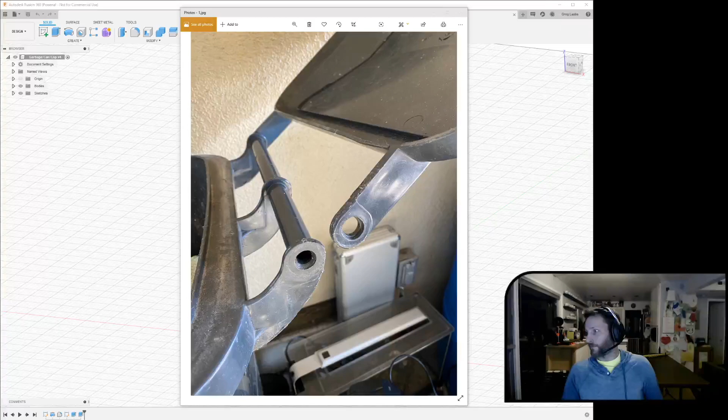So I had this problem where my garbage can lid broke because this bolt thing that goes in there snapped. That piece right there. So I designed a replacement in Fusion 360, iterated one design, printed a final, and it works perfectly.

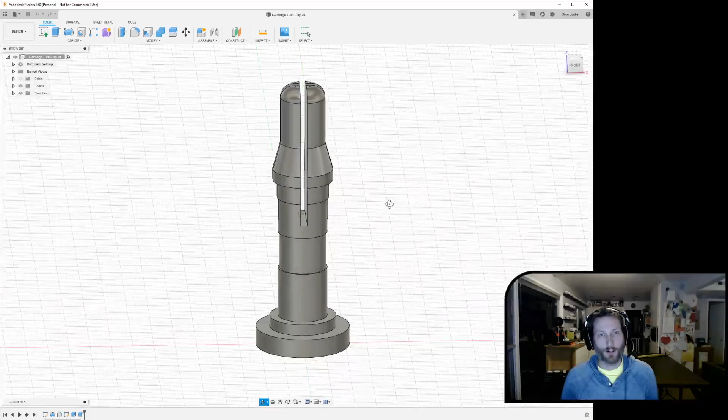A couple people were interested in how I designed this in Fusion 360, so I'm going to give a crash course in how I did it. So this is the end result of what I printed. It works perfectly so far. I have no idea how long it'll last, but hopefully a long time.

So first, I'm just going to give a crash course in a couple of basic Fusion 360 concepts that I think will be helpful going into it. If you already know the very basics, you could jump a little later to when I get into actually making the piece. I'm a beginner in Fusion 360. I learned it just a couple months ago. I've made like 5 things in it.

I really don't know what 90% of the things in this interface do at all. But maybe that'll help show you that you don't need to be an expert to actually be able to use it to make things. So in Fusion 360, it's parameterized design.

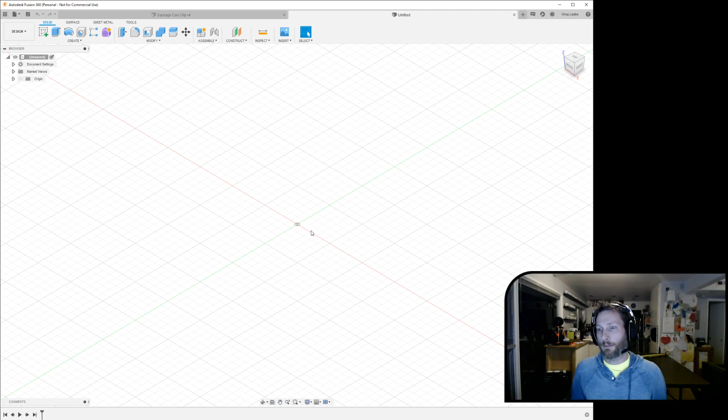And what took me a long time to wrap my head around is that I kept thinking of it like Photoshop. You'd be drawing and modifying it and using a bunch of tools and drawing on top of it and stuff like that. I no longer see Fusion as that at all. I see it as a series of mathematical equations, or operations that you want to do on your model, and then it computes the end result. And hopefully that'll become more clear in a moment.

Let's just talk about how you make very basic things in Fusion. Most of the time, when you want to make something, the first thing we do is we create a component. I actually don't know why we create a component. I learned this months ago and forgot. But what I remember learning is that it's similar to making a branch in Git.

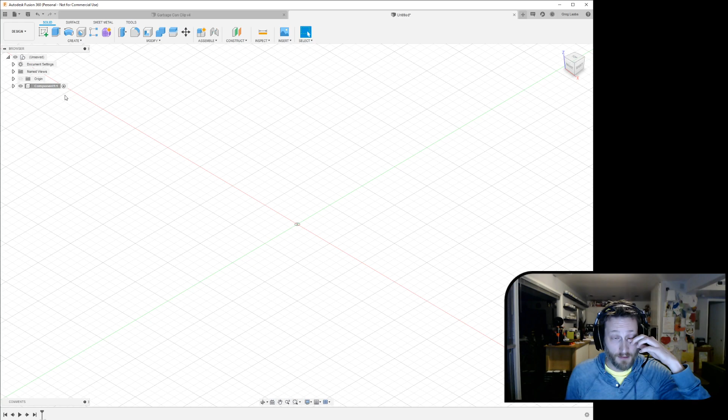You do it first because later, if you need to have had a component, it will be really annoying if you didn't do that as your first step. Exactly the same as making a branch in Git. So just make one and then don't worry about it. And now that component is active with this little dot. That means everything I'm now doing is inside that component, which is what we want.

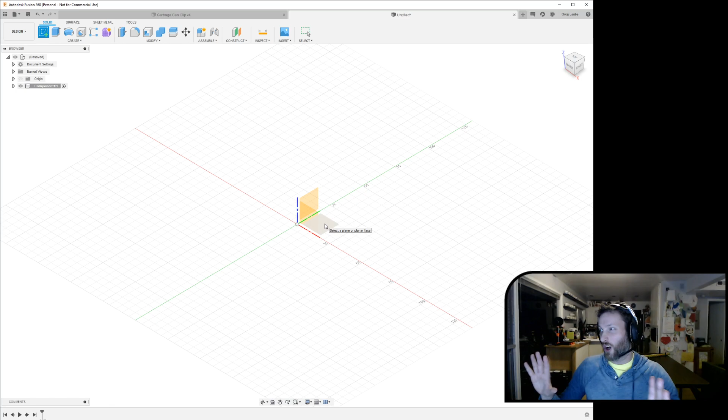So first things first is we make a sketch. You click this create a sketch button and you're already confused because you're like, oh geez, what's going on? All you're saying is what plane do you want to draw the sketch on, because it's going to be a two-dimensional sketch. So I'm just going to click on any one of the planes, and now I'm sketching.

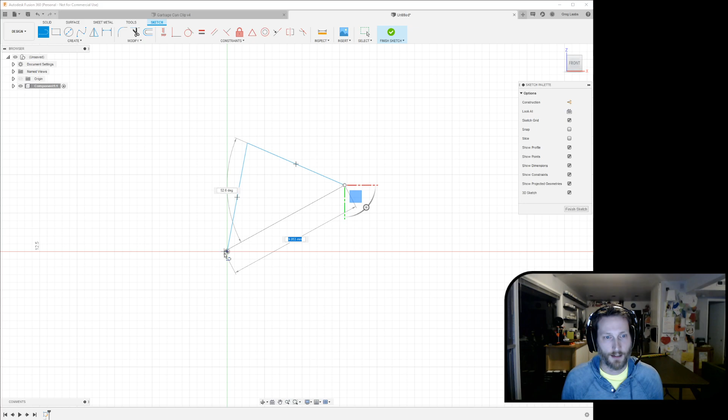Now it didn't actually pull my camera facing that way. I think it used to. I may have changed an option, but you have this little widget up here that you can always click to jump to the side that you're on. So here is what I'm going to do. I'm going to use this line tool in sketching, start with the origin, and make a triangle. Okay, and I'm going to click finish sketch.

Now that's a two-dimensional thing, and now we want to make something three-dimensional. So what you do next is you're typically going to pull that into a three-dimensional shape in some fashion. Oftentimes that's through extruding. There's a reason it's the very second button. Extruding simply means that you're going to pull that sketch, and now it's a three-dimensional object. And there's a bunch of options over here whenever you're using one of these tools.

So I did extruding from one direction, but I could do a symmetric one where now as I pull, it's going in both directions. And by default, it's going to create a new body when I do that, which is what I want to do now. But you can also extrude as a cutting tool, or you can extrude and join it to an existing body. But for now, we'll just do that.

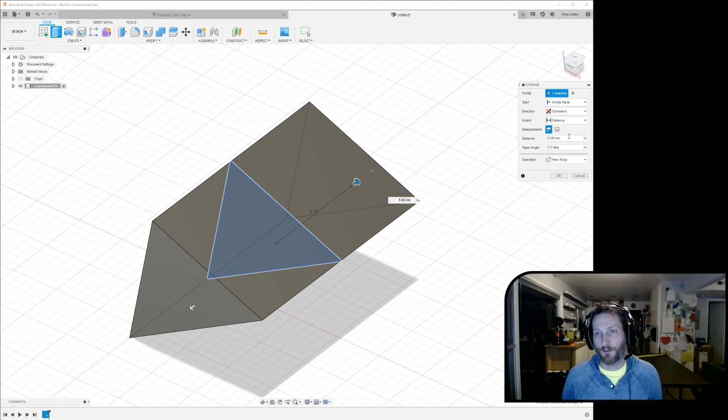Now we have this prism, right? So okay, now we've made a shape in Fusion. And why is that different from other things that I've used, or my assumption that it would be like Photoshop? Like any other tool in the whole world, you have this history bar down here. Actually, let's do another operation on this thing.

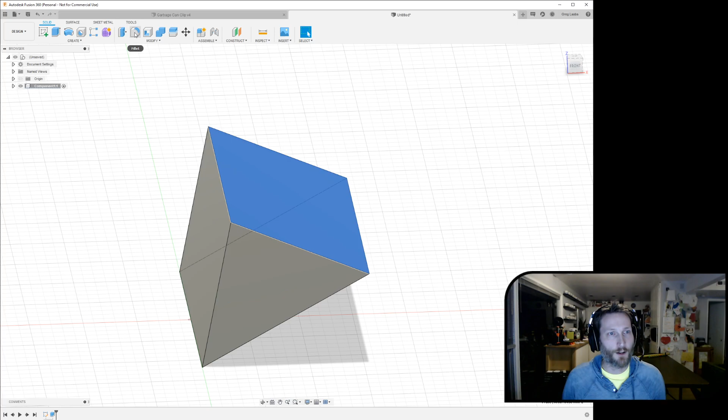So I'm going to modify this thing one more time by selecting a face, and I'm going to use one of these modify tools like Fillet, because that's kind of a fun one. So I've got Fillet here. I'm going to drag this here. Whenever you're dragging, you also see the numbers here, like I could type it in if I knew how much. So I'm going to fillet this, which is gonna do that.

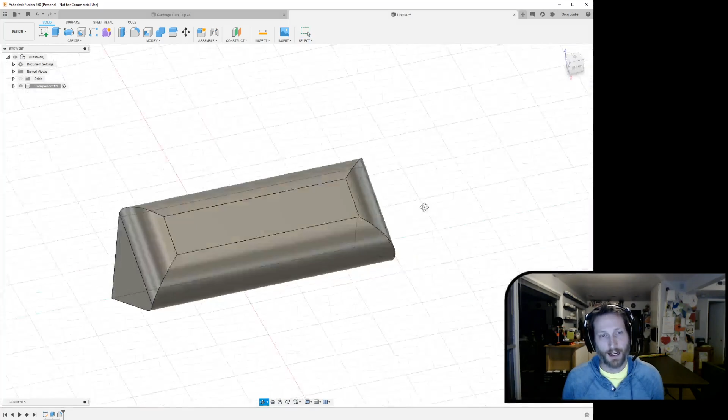Okay. Now my shape is looking really funky, right? And it kind of acted a little weird because it was a rectangle, not a square. So we've got this. But let's say, on the very first step, I screwed up, and my triangle needed to have been a totally different shape. Well, down here in the history, you can drag your little history bar back to go back in time. That's nothing special, right? This is back before I extruded it.

Oh, something that you're noticing here is the sketch is invisible. This is your hierarchy up here of your project. So if I expand my component, I have sketches and bodies. This is the body. This is the sketch. The sketch became hidden. Fusion does that automatically after you extrude or turn it into a three-dimensional object in any way, just because usually that's what you wanted to do and you don't want to see it anymore. So it's convenient, but if you want to see it again, you got to toggle it back on.

So I can go back in time and see the sketch, right? But notice that when I'm back in time here, oh, never mind. The thing I was going to say is not true, so ignore the thing I didn't say.

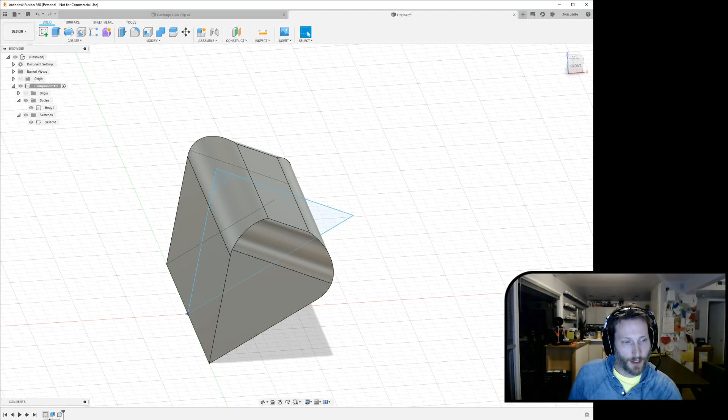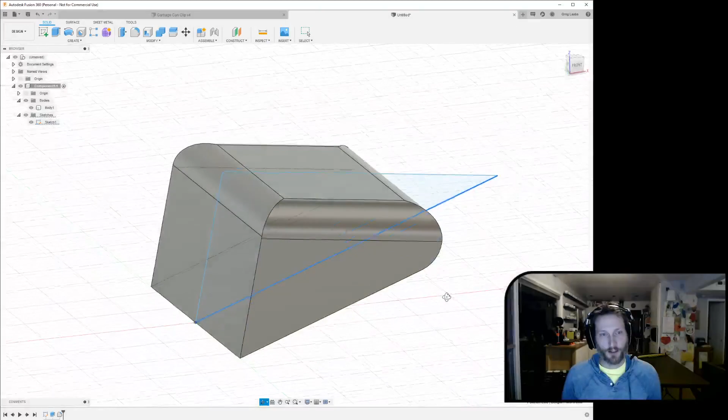But let's talk about how this is different, where if I double click on this sketch here, I can edit the sketch again. Let's make it like a much sharper triangle and do finish sketch. Now, I'm already looking at the finished product as if that was the sketch I had done from the very beginning. When you modify something in the history in Fusion, you're modifying the parameters of that operation, and the future things you did on the shape are still there.

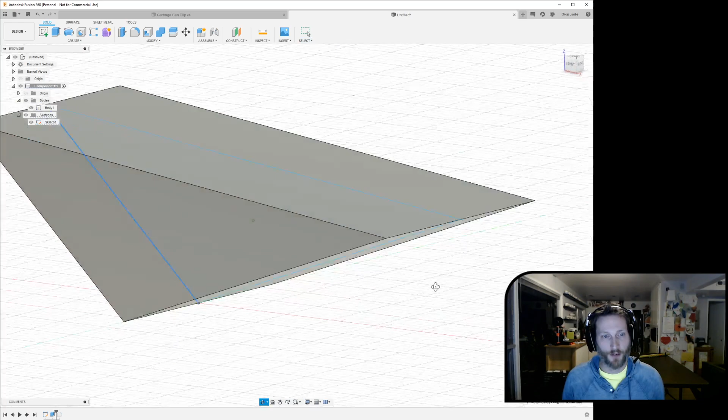So the fillet makes it a little hard to tell that it's going all the way to that end, but if I undo the fillet, for example, we can see that's the prism that it made. It's the long triangle now. And if I go back and edit the sketch again, I could change it completely. Actually, I don't know how to break this into another piece. We'll get to that in a moment. But if I changed it completely and made it like that, now here's my prism. And if we go back to what it looks like with the fillet, there it looks like that, right?

So that's like the first sort of mind-blowing thing to me. I've never used any other CAD tools before, so I was not familiar with any of these sorts of principles. And it's the thing that took me the longest to figure out, is that Fusion is just computing a series of operations and giving you the end result. And once I wrapped my head around that, figuring out how to make things in it became way, way easier. Let's jump back for a moment.

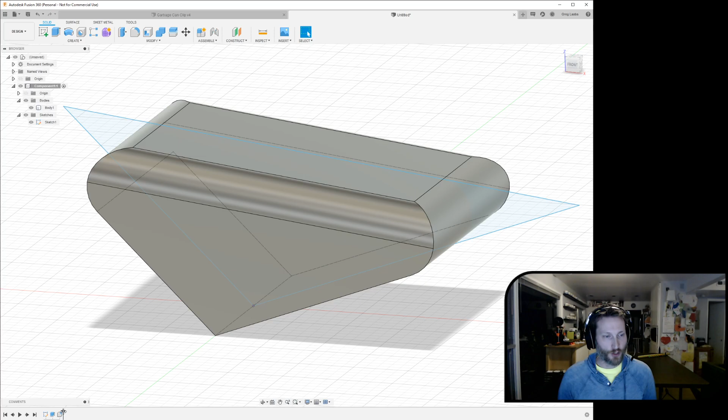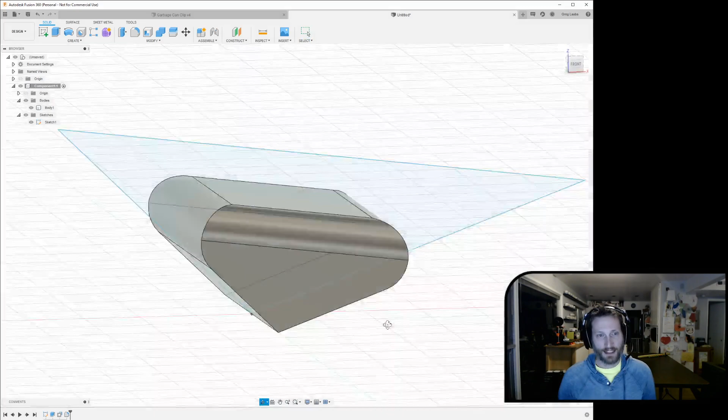Let's actually delete these. So if you go back in time, here's another important thing to know. If I go back in time and do another thing to this face, like press pull, I actually don't know what this does. Oh, it just sort of changes the shape there, and then press OK. The fillet operation still happened. And if I go back to the present time in history, that's now what it looked like after I pressed the face and then filleted the face.

So when you go back in time, it's not like Photoshop, where if you go back here and then do something, it wipes out the future. You're just inserting a new operation in there. So if you don't want to have done any of that, you actually have to delete what you don't want, right? So it gave a warning because I deleted something that a future operation depended on, so it warned me that it was going to delete the future operation. Let's talk about one other way that you can.

There are lots of ways that you can create a shape from a sketch, but I'm going to talk about the only other one I've ever used, which is the very third button up on the interface, which is Revolve. So Revolve, instead of extruding, which pulls a sketch out, Revolve spins a sketch around an axis to create a three-dimensional object. So when I use the Revolve tool, first it's having me select the profile.

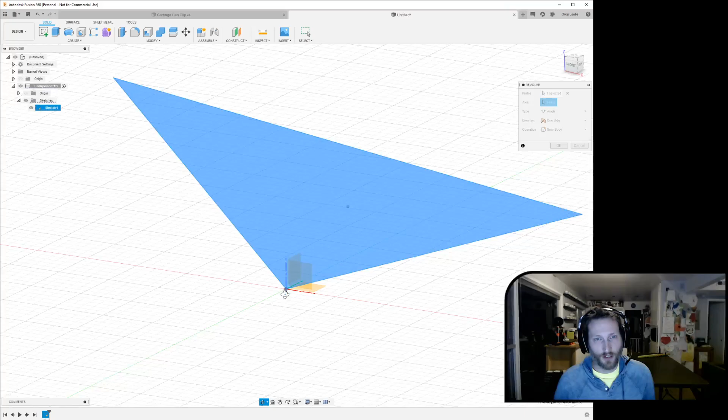This was already selected because it was selected when I pressed the button. And then it's asking me for the axis. So for the axis, you can give it a world axis, like these X, Y, Z's here, or you could select a part of a sketch or anything else that it lets you select in the design. So let's revolve it around just the vertical axis, the Z axis. And then click, what are we doing?

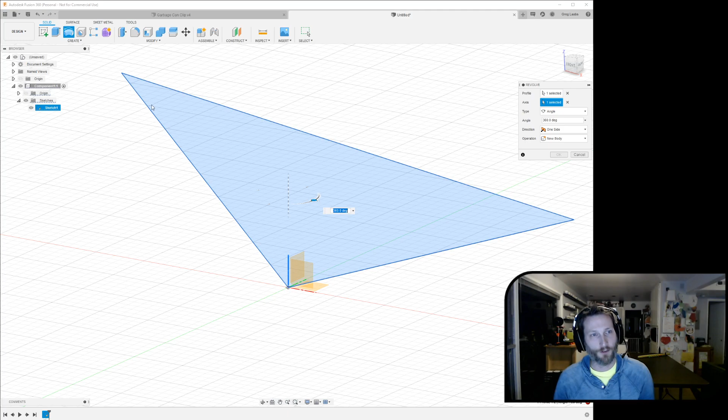There's an error. Oh, there's an overlap. I can't revolve it around that because it's on both sides of the axis. So instead, let's pick this line here. If I had kept it as a triangle with a vertical line, it would have worked. But let's use this as the axis. We can see what we have is now a cone.

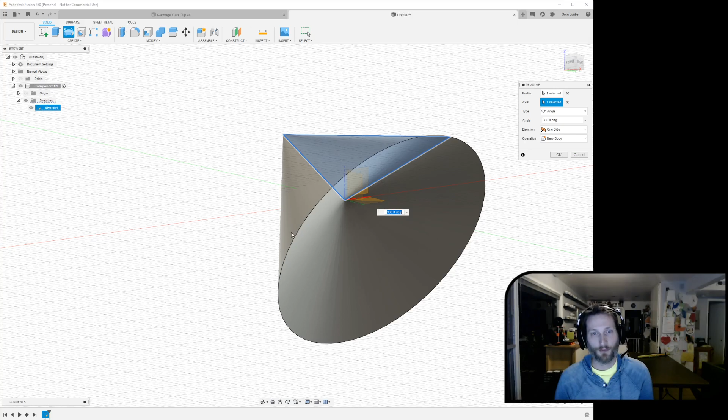Actually, it's not a cone. It's a cone with this little, I don't even know what you would call that. I'm failing high school geometry here, but whatever. It's got a hollow area here because that shape revolved around that. And so now I have this body that is that shape. So that's the very, very basics. Let's jump into making this thing.

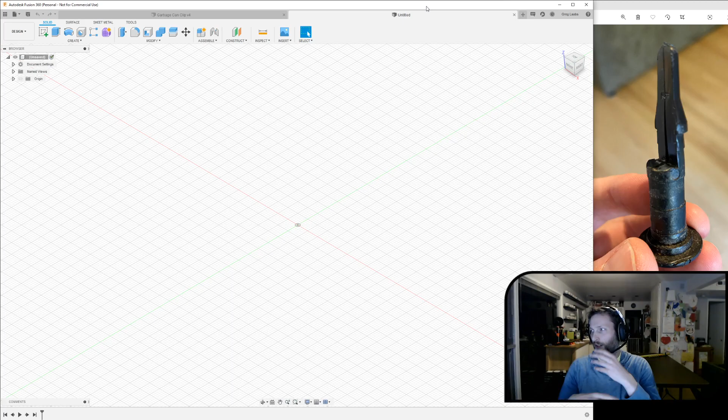So I'm just going to go ahead and wipe that whole thing out and not save it, and click up here for new design and start from scratch. So when I was looking at this piece, which I'm holding here as well, because I'm going to do some real world things that I will show you. Let's jump back to that and put it over here. I was looking at how would I create this from scratch. And so what I was saying about visualizing this as a series of operations is really important for figuring out how you want to start.

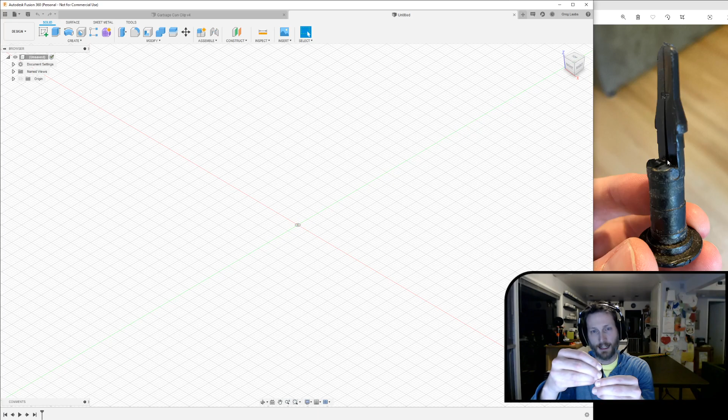So when you look at this thing, the most important thing to realize is that it is entirely a revolved silhouette around the middle axis. There are cuts in the middle here that let it bend in the top, and that's how it pressure clips into the end. But let's ignore that for now because we can cut that out later. What we want to concentrate on now is if we just make this silhouette here, the edge of it, we can then revolve it around, and we'll get this shape.

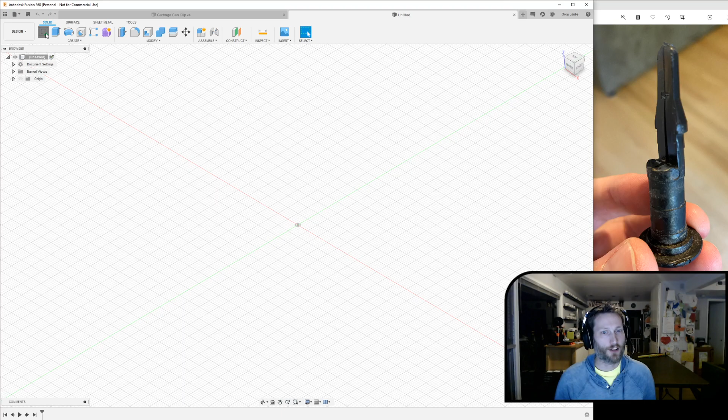So how I got started with that was I'm going to put it on this axis here. Again, it didn't move my camera, but there we go. And the way I did this, just because it worked for me, was I decided to just freehand make the shape. The dimensions are going to be completely blown to hell. It's not going to be the right thing at all, but it will still work. So I just use the line tool. I'm going to start right here. This is going to be the bottom middle of it.

So while the original is actually rounded on the end, since that's where it's going to sit on my print bed, I'm just going to have that be flat. Also, I think it's just for aesthetics, so it doesn't really matter. So mine's flat on the end. And we see that goes out kind of far. That's that little bottom bit there. Then it goes here, and it's got some amount of height. It goes in more, like a little bit.

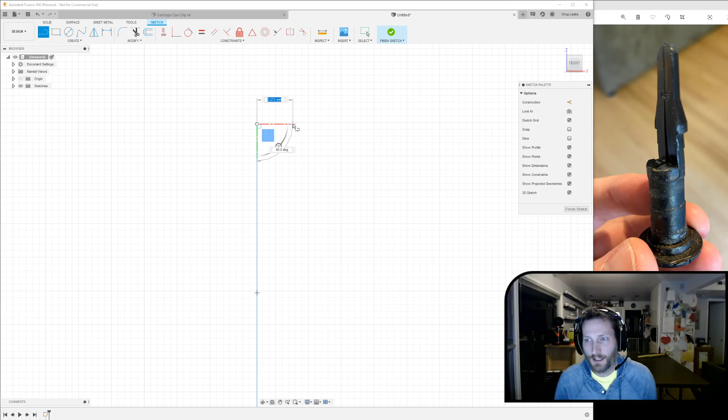And then it goes in just a teeny tiny bit and goes here, and it goes in a teeny tiny bit again. And then it comes out. Oops, I'm going to zoom in to get a little more control. It goes out a little bit again. Oh, hang on, I got a constraint that I didn't want. Actually, we'll leave that there so we can talk about it later. And then it goes out some more, and it comes over this way a bit more.

And I think this is where it goes like this, and it does a slope in this way. And then it goes up to the end. I'm going to make the tip flat here just for ease, and I'll show you why I'm going to do that later. And then it goes all the way back to this axis here, which I was hoping it would snap to, but it's not.

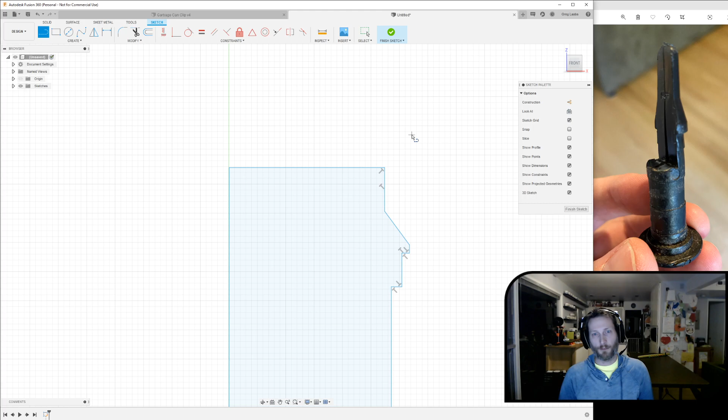I'm just going to get it as close as I can because I can fix it later. And then I complete the shape. Okay, so I've now made this freeform shape here. And in fact, just to see how it looks, I'm going to finish the sketch. Now I have this thing that is totally the wrong dimensions, but it doesn't matter.

Now we're going to go ahead so we can see it in 3D space. I'm going to do that same revolve tool around this axis. There it is. That's my thing. Looks exactly like it, right? Not at all, but it's the right basic structure. And I'm going to go ahead and make it. So here we go. That's it. Now we just need to go back and fix the sketch to be accurate.

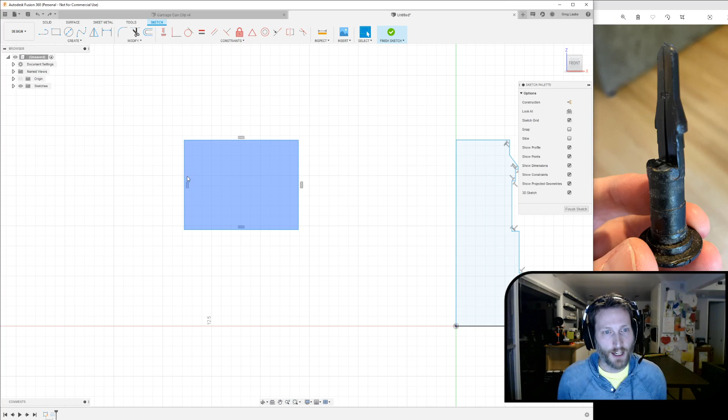Now, I want to talk about some of the things. There's like a lot of icons on the screen. And understanding what these are is pretty important for working with sketches and not getting incredibly frustrated, because it's going to do things that are unexpected if you don't realize what all these little icons are. So for the sake of talking about this, let's just make a rectangle over here. And let's look at what happens when we make a rectangle.

You always press enter to finish an operation, or alternatively, you can right click and there's an OK or a cancel there. Right click is just a shortcut to things that are elsewhere on the interface. Just if you get stuck, but you should definitely watch a tutorial on the basics of the Fusion interface.

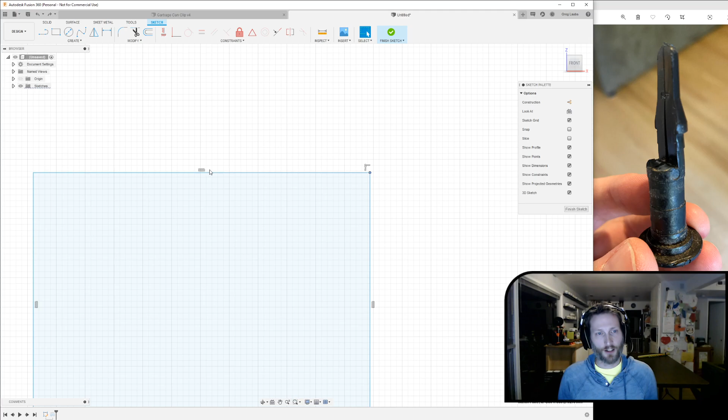What actually happened here when we made a rectangle was it created 4 line segments. So remember high school geometry, a line segment is just a line in between 2 points. What's interesting here is if I click on this point, there's a little icon here, and what all of these icons are is they are constraints. They are parameters for this sketch that Fusion will not violate. If I go and grab this side, it lets me go left and right, but it doesn't let me go up and down. Why is that?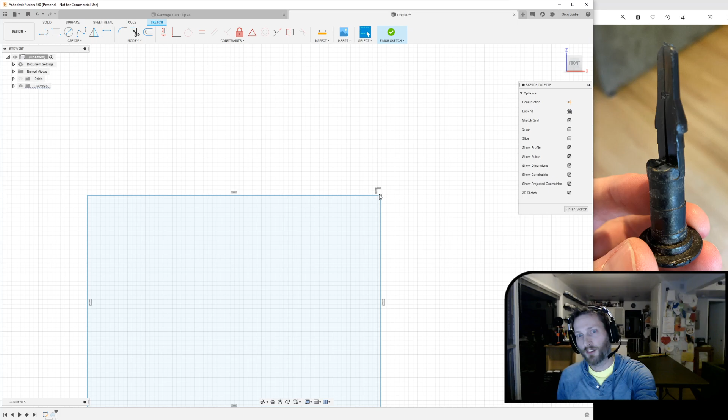Well, I made it as a rectangle, but how does it know that it wants to always be a rectangle? It makes some assumptions when you make sketches that are usually right, but not always, because it can't read your mind. So these icons right here, these are vertical horizontal constraints. Yeah, this is called a horizontal constraint. It is saying that this line segment here must always be perfectly horizontal. And same with this one, and these two side ones have vertical constraints.

Furthermore, if you click on a point here, this one's kind of interesting. There's a constraint here called coincident. What that really means is if I drag this point, notice how the whole shape moves. You could think of it as, well, I'm grabbing the point that those two line segments end in, but technically those two line segments each have their own point. And the reason it moves together is because the end of each of those segments has a coincident constraint, meaning it should be on the same point.

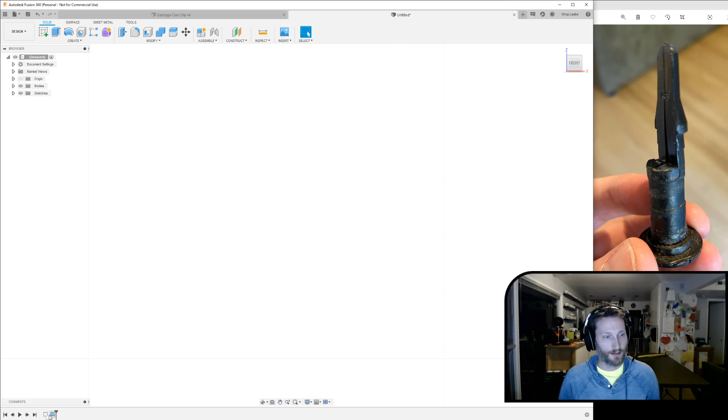If I delete that coincident constraint, you can actually click on the icon and press delete. When I drag this now, suddenly I've broken the shape because these 2 points no longer have a coincident constraint. And I can remake that as a coincident constraint by dragging it over here. Well, let's talk about how you actually make a constraint. It's having trouble getting to where I want it to be, but that's okay.

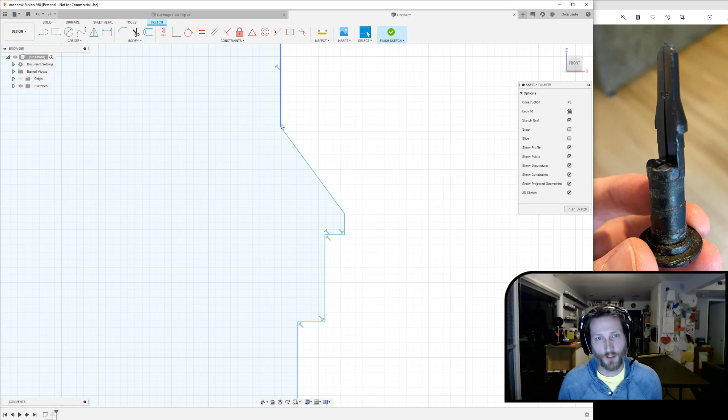What I'm going to do is I'm going to select one of these. Up here, this entire section here is the constraints. Oh, they're all there. So the coincident constraint is this one. If I click here and then click on the other point, I've now created a coincident constraint, and oops, I finished my sketch. That was an accident. Let's get back in there. There we go. It recreated that coincident constraint, and it moved the lines in order to make that possible.

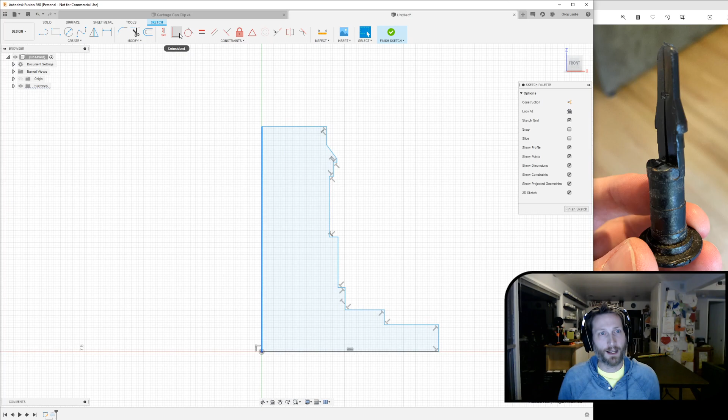So that was just a crash course on what constraints are, and so we're going to delete all of that and go back to this. There's a lot more constraints that we see here. This is one of the most common constraints right here, which is a perpendicular constraint. I also think of it as a right angle constraint. So what it's saying is these two lines here are perpendicular to one another, and it will never violate that unless I delete that constraint. Notice that up here, for this sloped line, there is no perpendicular constraint because it's not.

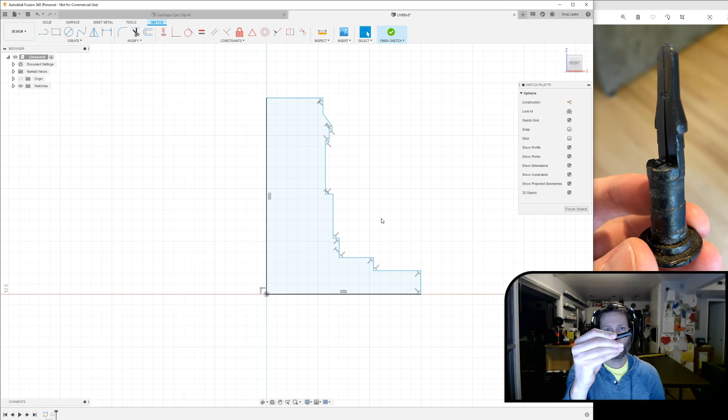It also did not make a perpendicular constraint at this corner because I had to freehand place it, and it didn't actually end up on this axis. Now's the time I can fix that. I intended for this to be a horizontal line. No problem, I can just add the horizontal vertical constraint. It's going to pick horizontal or vertical based on what it's closest to being.

So now this does happen to be perpendicular, it just doesn't have the constraint there. I might not need it. Well, actually, I'm going to go ahead and add a horizontal constraint to this one. Oh hang on, I don't know what I'm doing. There we go. Well, let's not worry about that for now.

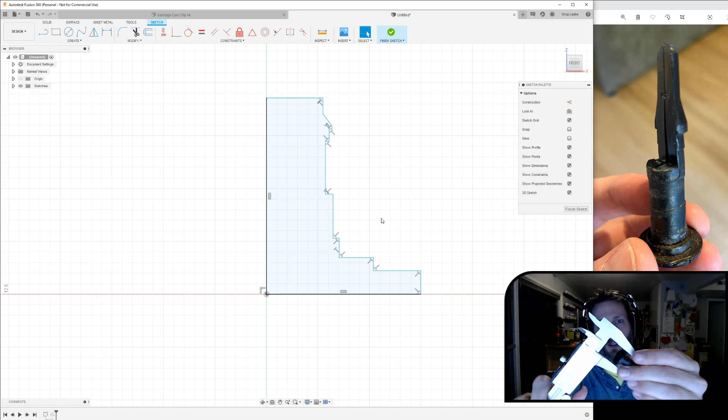So I've got this shape. Let's talk about inputting the dimensions here. This was completely freehand, but now I want to start doing some measurements. To clone this, I need to know the dimensions that it needs to insert into the garbage can. For that, I have digital calipers. These are absolutely critical if you want to make something that fits into something else that you already have, because you need very precise measurements.

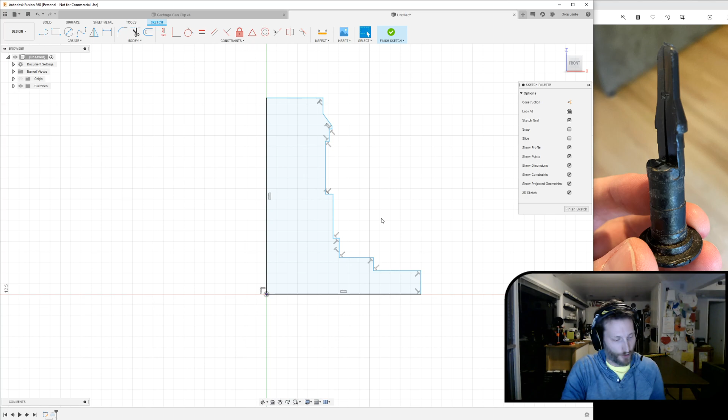So these are digital calipers. It's got a zeroing button, which also comes in handy, that guy right there. So all I got to do is go here, and I measure here. It's a little hard to measure a rounded shape because you could have it off. So the old phrase, measure twice, cut once. I measure like 40 times here just to make sure, rotate it around, make sure I've got it.

And then it says I'm at 21.97. We'll call that 22, that's well within the margin of error of this tool. This measures within a hundredth of a millimeter. I don't really trust it to a hundredth of a millimeter because I can just apply pressure against the metal and it changes the measurement, but the tenth of a millimeter is probably accurate. I've already forgotten what I said it was... it was 22. So here's how I put that into Fusion.

You can apply another type of constraint. I guess it's not technically a constraint, but it's called a dimension. That is, I'm going to input the dimensions of a particular part. So that's this tool up here, it's also the D key. So you push it, and you basically press on the line. You click on the line that you want to give it a dimension.

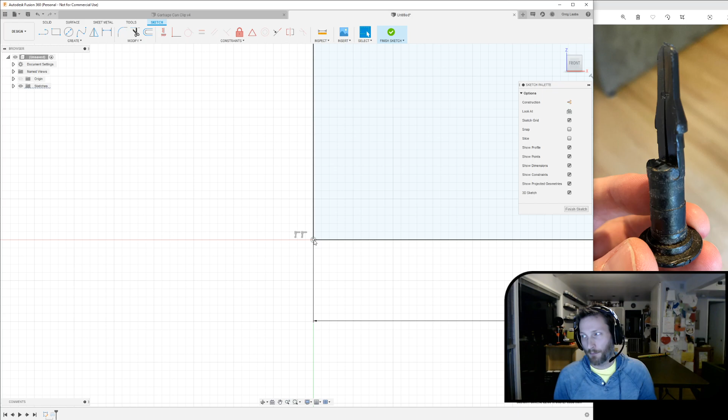And I measured this, I measured from here all the way to the other side, the imaginary other side that we don't have in this sketch. So I'm going to do this very bottom line, it'll be the flat bottom of this whole thing. So what I do is you click there, and now you've got this. Where you place this is just for aesthetics, it's just wherever you want it to be.

It's right here, and oh look, this is only 7 millimeters, so I was way small. I put in 22. Boom. Now that is 22. The reason I called it a constraint is because now Fusion won't violate this. This is locked in when I go to try to move things, so if I try to move this point, I can't move it left and right because 22 is locked in.

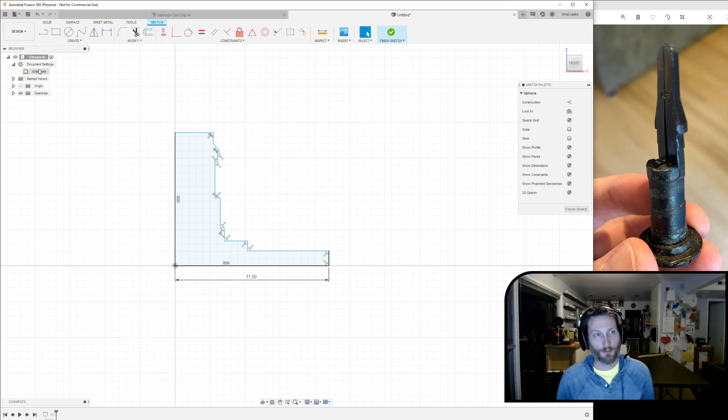And there's another constraint I didn't talk about. When I started my sketch on this origin point at 0,0, by starting it there, it created - I think it's a coincident, well, it locked it to that point. I think there's a coincident constraint there to make that happen.

So now this is locked in at 22, except I made a mistake, which you may have already noticed: 22 was the entire diameter, I actually want that to be the radius. I don't have to do the math myself, I can put in a formula here. So that way I know this is the original measurement I took, 22 divided by 2. Now it becomes 11, but the formula is still there.

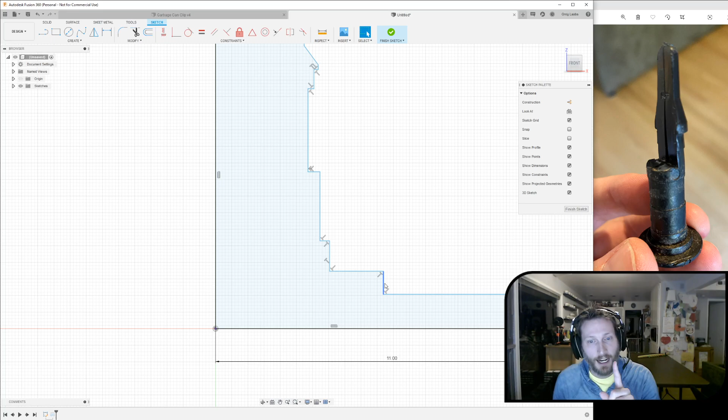Okay, I didn't say this in the beginning: I'm working in millimeters. It's really important, up here in your hierarchy, to expand your document settings and make sure the units is set to the unit type that you want to work in. Because you can type everything here without units, but it will use whatever the document's units are, so make sure you set that. You might need to set that in the beginning - I don't know if I change it now what happens. So do that first, even though I didn't. It remembers, I'm pretty sure, it's just always been millimeters for a long time now. So now, how do I set the constraints for the next area?

So let's say I take the measurement. I'm not going to get accurate measurements here because it doesn't really matter for this tutorial. I'm going to go and measure this next little bump in, right? And it's 15-ish, so let's call it 15. Well, I don't have a line to work with that goes from this wall to the middle, and that's what I want to input 15 as.

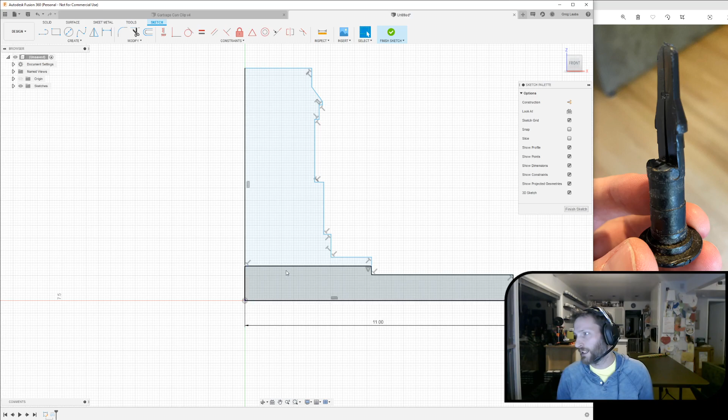So what I can do is, Alexa, turn on the family room. Sorry, my auto off. What did that happen? Oh, because I quit Steam.

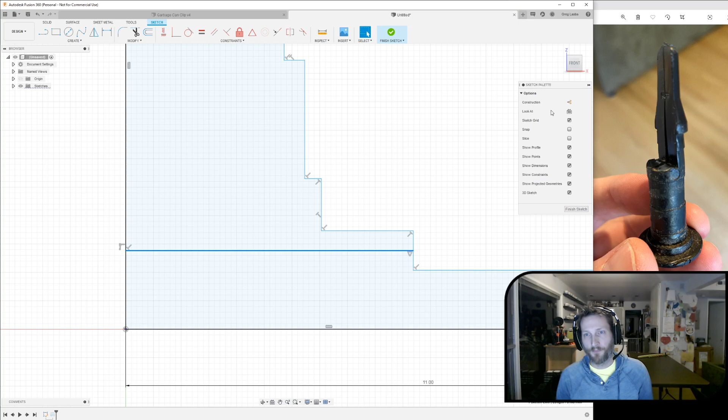Anyway, I don't have a line from here to here, so all I have to do is make one. So right here, when you're drawing a line, you can see another constraint icon. See when I'm in the middle of the line, it makes the triangle? The triangle happens to be the midpoint constraint, just because it's nice and pleasing to my symmetrical sensibilities.

I'm going to start there. I'm going to go over here and see how it kind of snaps when it's horizontal. It wants to help you do what's obvious. So I'm going to go from here and then go there.

I now have a line, but I also have a problem because now my shape is separated into two, and I didn't want it to be two shapes here. I just wanted this just for the sake of measurement. Well, Fusion has a concept for that.

You click this line, and you can right-click it, and it's this thing right here called normal/construction. It's a toggle. So everything here is normal. There's also a button up here that does the same thing. Fusion has a lot of ways to do the same things. It's also X, which I use a lot, so I use X a lot.

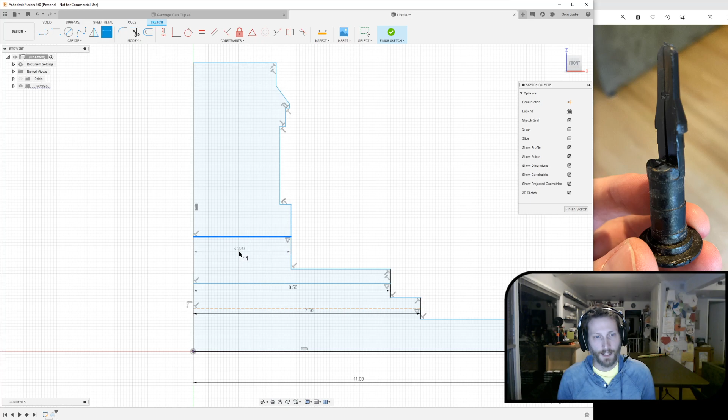If you change it to a construction line, it no longer has what you might think of as a physical meaning in the sketch. So it no longer divides the shape in two. It is there strictly for construction purposes, which is what we want.

So now I can use the dimension tool again. I'm going to press D. Since I already had it selected, it was already there, and I'm just going to put it right below it. And now I said this was 15, right? This time I'm going to remember to divide by 2. Now it goes 7.5. So what I did was I put a construction line that's bound from here to there, and then gave it a dimension, and now we have the next step down.

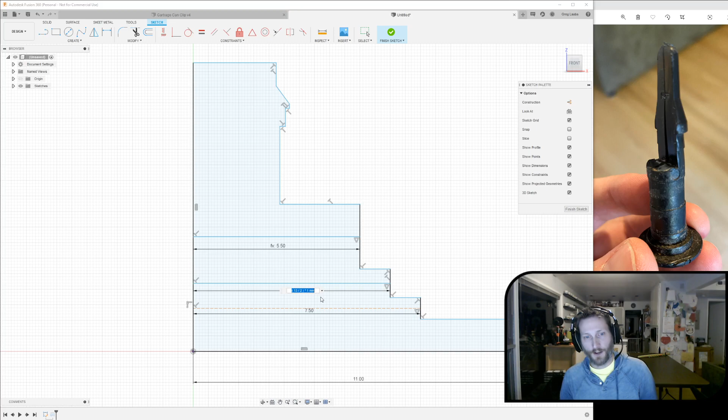So let's just pretend this next one was 13. I'm going to do the same exact option. I'm going to press L, create a line from here to here. Then I'm going to push dimension to do that, and then we're going to call this one 13, right? And then we do the same thing here, from here to here.

I'll give you a little tip on this next one, since we're not going to do this whole thing. Instead of saying, okay, I'm going to do let's say this one's 11 divided by 2, let's say if what was important to me was that it was 1 millimeter less than this one. Well, while my text input is in there, I can also just click on another dimension, like this one.

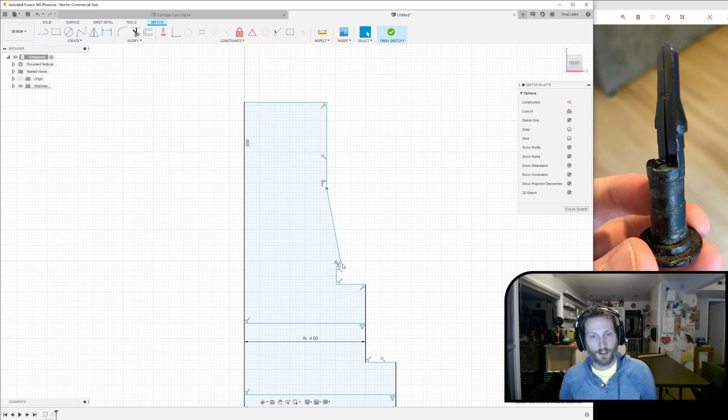That dimension happens to be named D4, because it was the fourth one I made. And then I can go -1. So this, and see how it says fx, it means it's a function. So this is 1 millimeter less than this. And if I go and double click this to modify it and say, no, this was actually 12 millimeters in diameter, now that adjusts dynamically there.

So I could go all the way up the line here and go from here to here and then do a dimension on that one, and I'm going to call that, we'll say this is here, but +1 again. Oh, whoops. Oh, that actually did work, but that was not what I wanted. Let's go minus, because that doesn't look right.

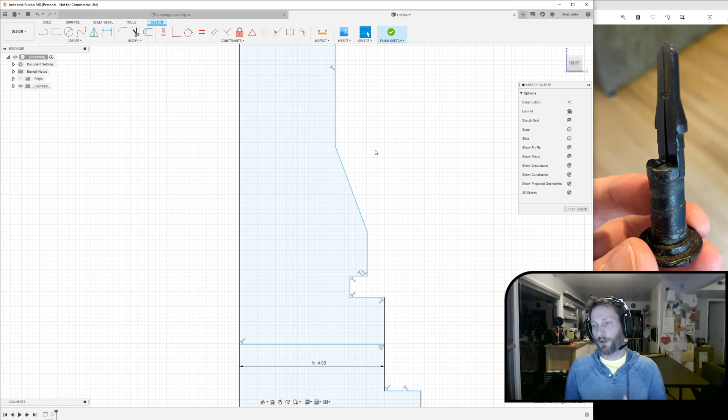And we could go all the way down. I'm not going to do every part of it because we're not actually trying to make the full thing here. But let's say this part definitely needs to be bigger just for the sake of doing the next part. And this should be like here. So now I'm just free dragging it, which wouldn't get me accurate results. But okay, there we go. So now we've got something that's more approximates the thing.

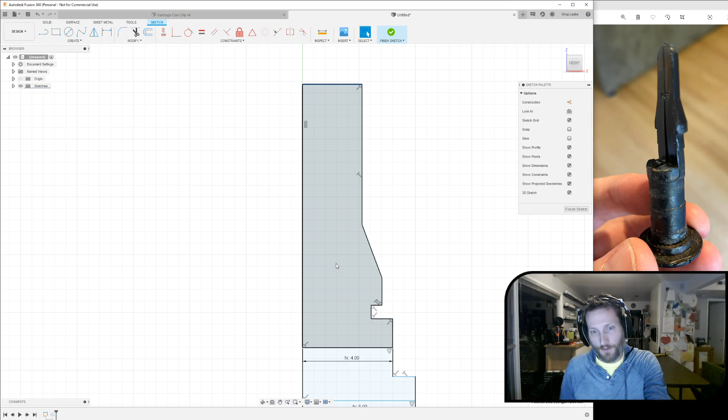Let's make the end a lot longer. So what I did for the dimensions on this diagonal shape was I used the calipers and measured the diagonal length there.

And because I also had this length constrained and this length constrained, it all worked out because there was only one way it could solve for that.

When making dimensions and constraints, it's very easy to make too many. You only want as many constraints as necessary to define the shape. If you put too many, you'll start getting solving errors where it can't figure out how to reconcile everything you've put in. Maybe you made a mistake, maybe you just made it too complicated. So there's a whole science to what you should actually give dimensions and when you shouldn't.

I'm not an expert on it, I have no idea, but I just did it for all of the changing diameters up and down this whole thing, and it worked. So if I finish my sketch now, again, we can already see here is the modified shape. It is a far cry from the real thing, but if I had actually input all of that in, it would have looked right.

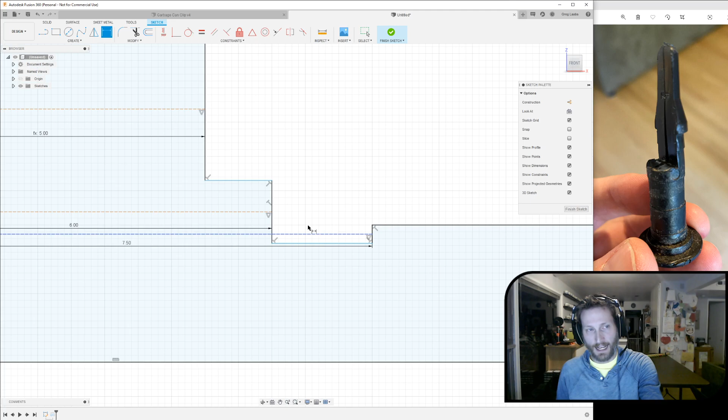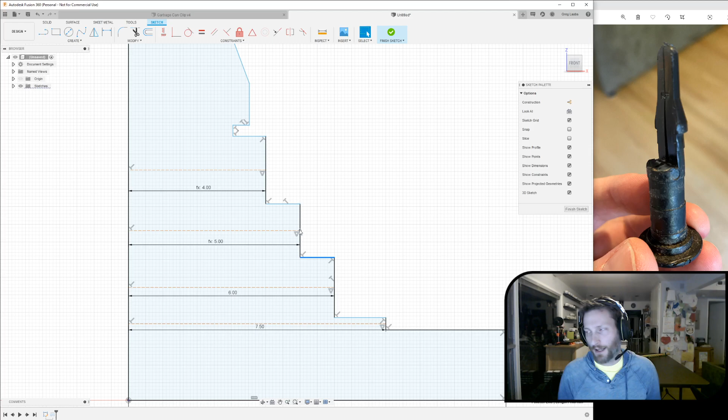Because the big thing I didn't do in this example was I didn't do any of these dimensions, and I also forgot to make each of these lines construction lines. Notice that it still worked because while these are discrete shapes now, you can still, when working with the sketch in 3D space, select the whole object. But it's a little nicer to have these as construction lines so it's more semantically true. And I'm sure it has ramifications and things that I don't understand.

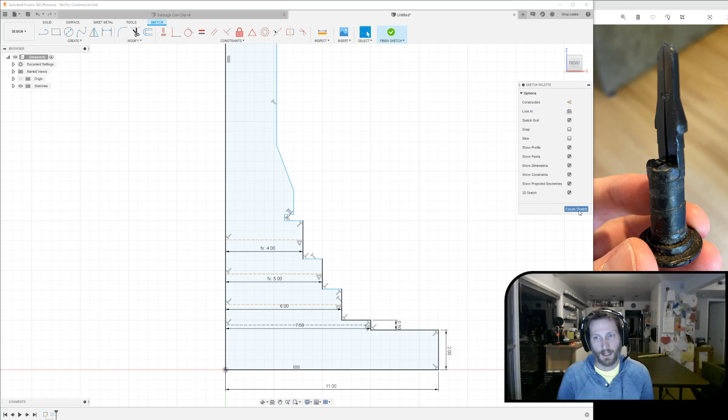So what I didn't do is measure the height of each of these sections. So I would do that and need to do this. Let's say this is actually supposed to be 2 millimeters. Now notice because I made this 2 millimeters, over here we've got a shape that doesn't look at all like what we had. So I would just want to drag this back up above, and before I've got the dimensions put in, maybe I just want to do this to keep it more organized in my head.

But see, it's keeping all of the constraints and everything's working. In fact, you can see because of the combination of constraints going here, it's doing a sort of odd thing where it's moving that line when I move this line. And that's because of the combination of constraints that has to be true. I'm not sure why in that particular case, I think it was pivoting around this midpoint or something like that. So it can be a little confusing when it's doing things, but just remember it's solving for how to make all these constraints stay true.

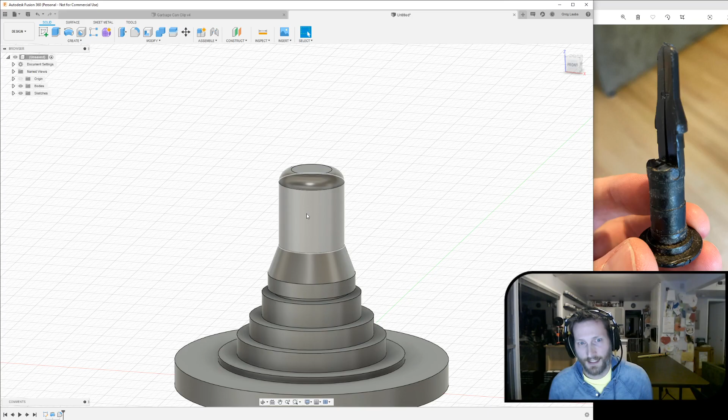So once you input all of these dimensions, I'd put this one here. I'd put this one here. Maybe this is only a 0.5 millimeter, so I'd go 0.5. I'd go all the way up and do all of these dimensions that are necessary, and then finish the sketch.

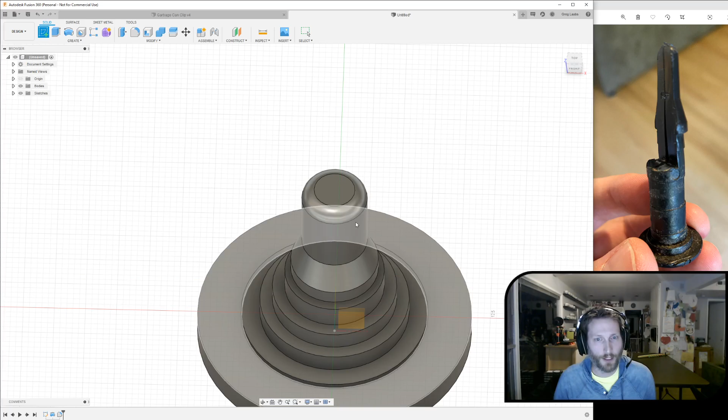So I said I was going to make the top flat and come back to that because in my final, it's not flat. Instead of making that curve in the sketch, which I could have done, but I don't really know how to use curves effectively in the sketch, I just went ahead and used the fillet tool I talked about in the very beginning to fillet the end. The only reason the end is rounded is just to make it easier to insert into the hole. So as long as it's got some fillet, who cares how much it actually is? That was my philosophy, so that was fine enough.

And now that fillet action is here. And if I ever want to change the parameters of the fillet, I can double click down here and now I can change how much I filleted it. So that was the basics there.

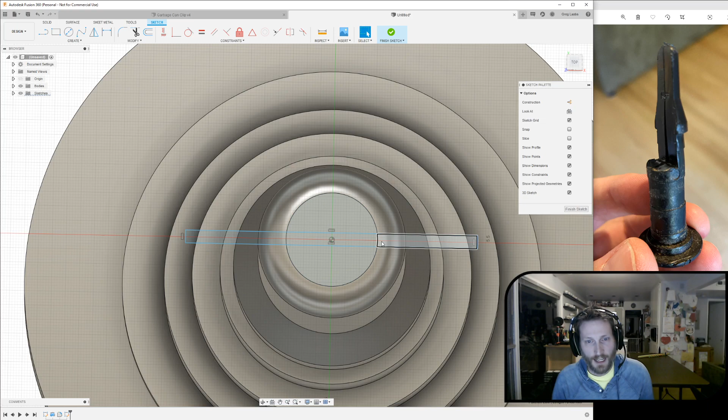I'm a little hesitant to talk about how I cut the plus in the end here. There's a couple different ways I could have gone, but I'm no expert here, and it was really messy the way I did it. But I started with thinking I should draw a sketch against this face as a plus, and then extrude it down as a cut. In fact, I can at least show you how we would do that if we wanted to.

Real quick, because that's very easy to demonstrate. So I just clicked Create New Sketch, and I clicked on this face. So I now have a new sketch that's being drawn directly on this face. And what we would essentially want to do is a rectangle like this, except we want it to be bigger. Here we go. Oh, see, this is where some stuff gets a little confusing when you're sketching against faces. The geometry of the face that I'm on is actually having an effect on my sketch.

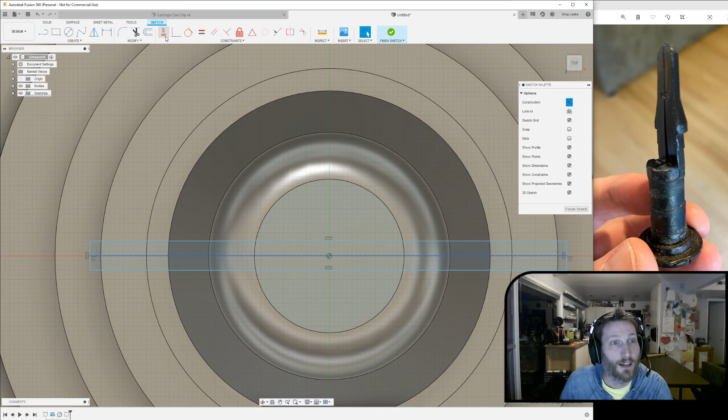There's like settings you can set that turns that off, and probably some of these checkboxes affect that. I don't know how any of that works. I just bumble through it. But anyway, look, now I have a rectangle that's here. That's good enough. I can finish the sketch.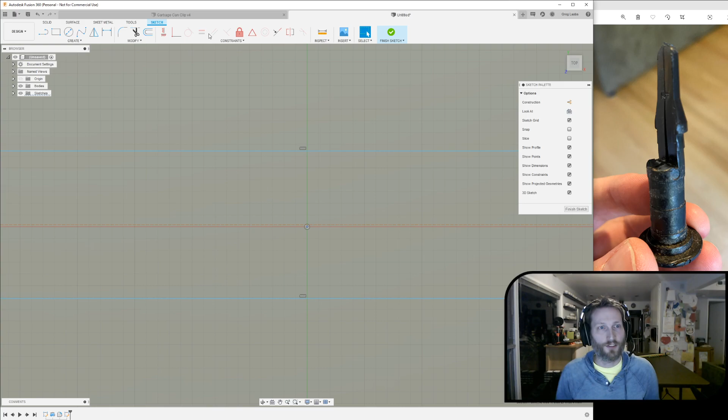Now, I didn't actually take the time to make sure it's centered on that axis. Let's go back and do that just because that's pretty important. The way I would do that is, how would I do that? See, what you have to do is wrap your head around the constraint that would make that possible. Oh, I know, I could put a line from the midpoint here to the midpoint here, and make it a construction line because I don't actually want it to divide the shape.

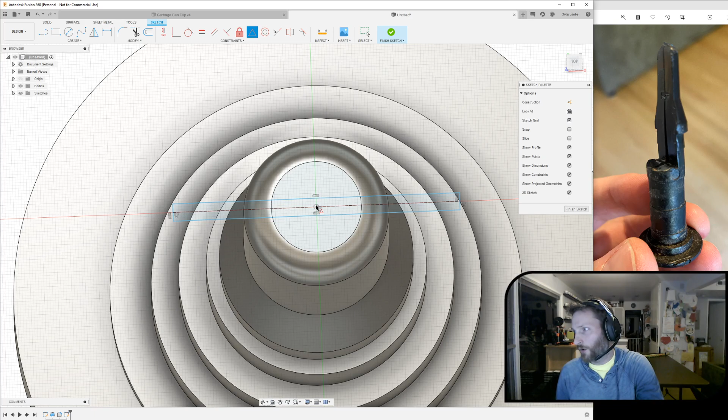And now I'm going to make this line coincident on this axis, the red axis. But I can't actually select the axis, so I don't know how. Something along those lines would do it. Here we go, the origin, which happens to be the middle, and there's my line. So I'm going to make the origin the midpoint of that line that I put across, and that should basically do what I want. There we go.

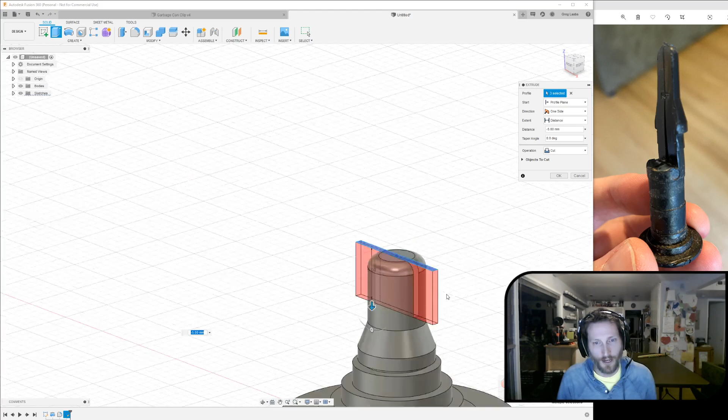So that's one way to do it, because that middle line, we know it's in the middle of the rectangle because it's on the midpoint of the ends, and it also means the rectangle is perfectly centered in this axis, the x-axis, because the midpoint of that line is on the origin point, which happens to be the very middle of this circle. So that worked. So we're going to finish the sketch.

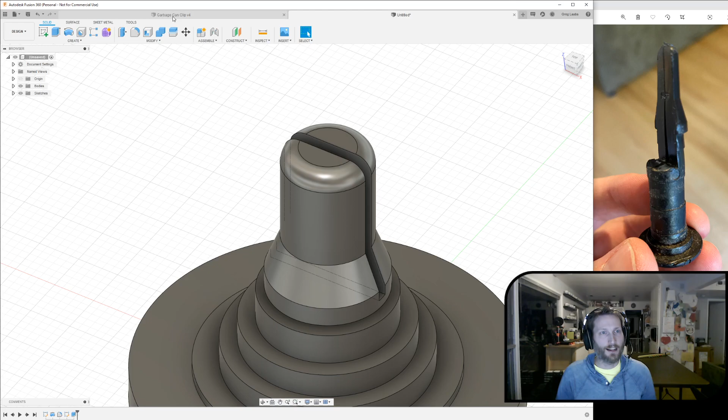Now we have this sketch here, right? So if I double-click that sketch to select the entire shape, I can now extrude. And here is the really cool thing. It actually didn't work. I got to select it again. Because I didn't fix this, dividing it into 3 shapes, I got to select all 3. But hey, it still works to just select all 3. So I should have fixed it if I was doing it right, but it doesn't matter.

So now I'm extruding, but that's not what I want to do. Over here, the operation, I want to change it to cut. So now I'm extruding as a cut. As you can see, when I'm dragging down, it's cutting the object. I would need to measure with the calipers how far down, but it's something like that far, right? And that's it. I click OK, and now I've cut the thing. That's really close. Now I just need to make one that's vertical and cut down that way.

Now I did all that. That's not how I ended up doing it. It would have worked fine if I had done that. The way I did it, I'll just go back to my original thing here. And you should also name your sketches and bodies, by the way, because it makes it easier later. But I didn't do that here. I have this sketch here. I sketched it against this axis instead.

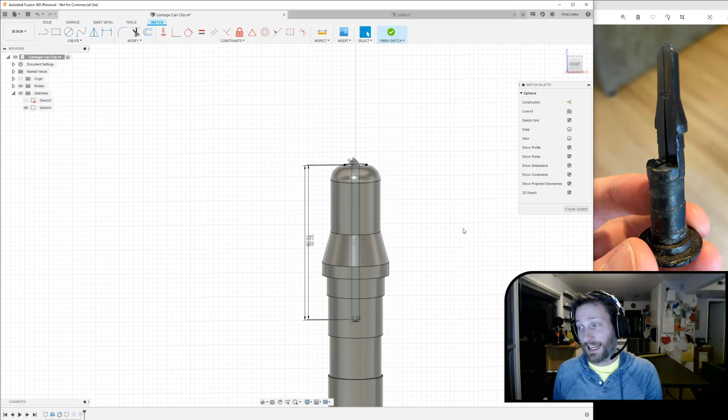The reason I did that was when I was looking really closely at this clip, it's hard to tell because this has been in the garbage can for years and years. So I can't tell if the plastic's been permanently bent from its original factory position, or if there's a tapering of the cut from here to here. I've tried to bend these back and look at it, and I'm pretty sure it's rounded at the very bottom here. The camera's not focusing. Whatever, you can see it in this picture, kind of.

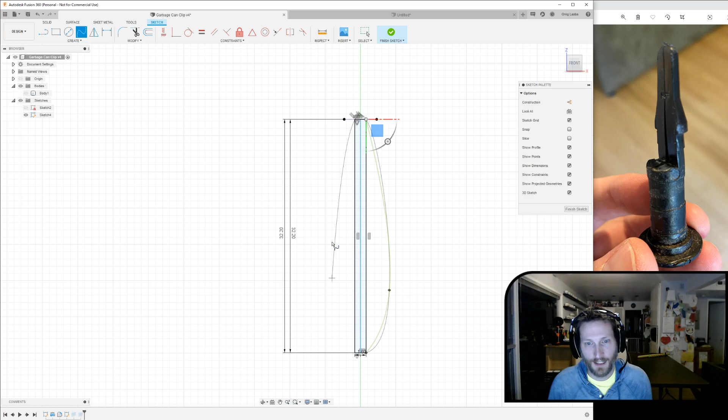I think it's rounded down here, and then it tapers inward, and then it's pretty constant going up the rest of the way. I'm not a mechanical or structural engineer or even know what the name of the discipline is that would study that sort of thing. I'm sure someone that actually does this would know exactly the way you should taper it for structural stability. I just made it a rectangle, and I tried it, and it worked, so I left it that way. Always try, because you can 3D print something so quickly to test it.

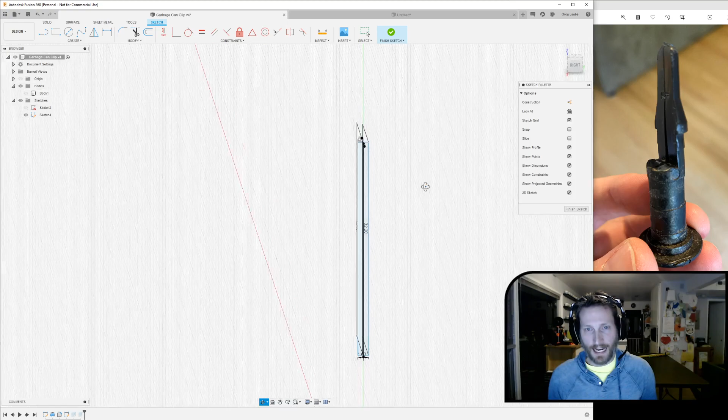Maybe you don't need to make it more complicated, but it would probably be stronger if I did it correctly, is usually the reason these things are done, or for cost savings. So I just did it as a rectangle, but that's the reason I did it against this face here, because if I needed to make it a different shape, in fact, if we just hide this body, this whole line here could be curvy. I could have done something like this, right? And then had this shape that was like, whoopsie.

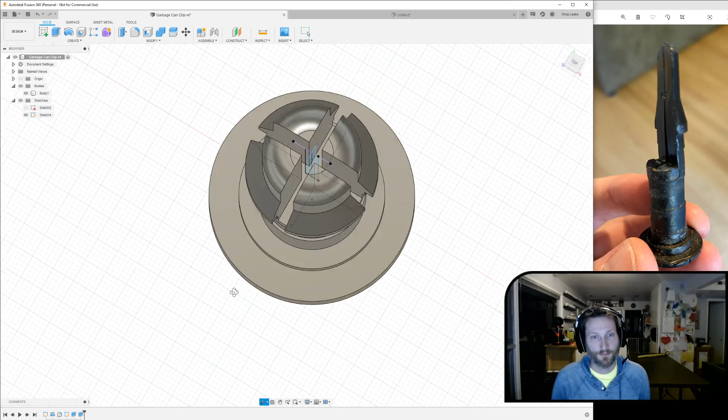And then I could have cut it in this shape, except actually what I'd want to do, right? It would be like tapered inward or something like that. It turned out I didn't need it, as far as I can tell. We'll see how quickly this clip breaks again. But so I just went with rectangle, but that's why I did it as this vertical shape.

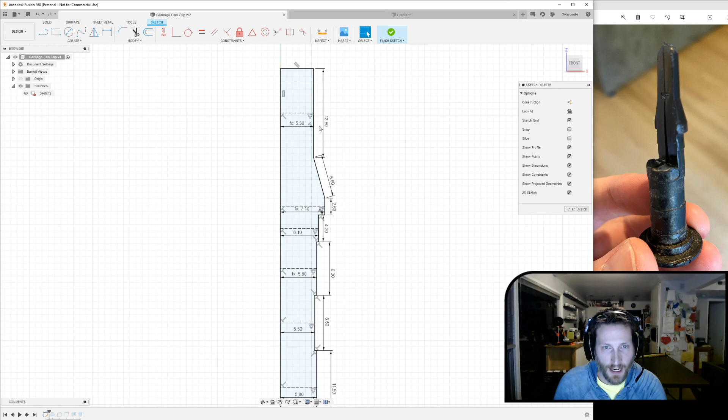The only thing I couldn't figure out was how to then mirror that exact same rectangle along the z-axis. I wanted to clone it and mirror it, but I wanted the mirrored version to be a permanent clone of the original. So if I changed the parameters of the original, the mirrored one would change. I couldn't figure out how to do that.

So I just had to copy it. And then if I had to change the original, I had to change the copy. Super annoying and kind of violates all that convenience of it being parameterized design. So I'm sure there is a way to do it. I just couldn't figure it out. And because it was just a rectangle, it worked out. So I did it on that face and then on this face. And then I extruded as a cut in both directions. And that's it. That's how I made it.

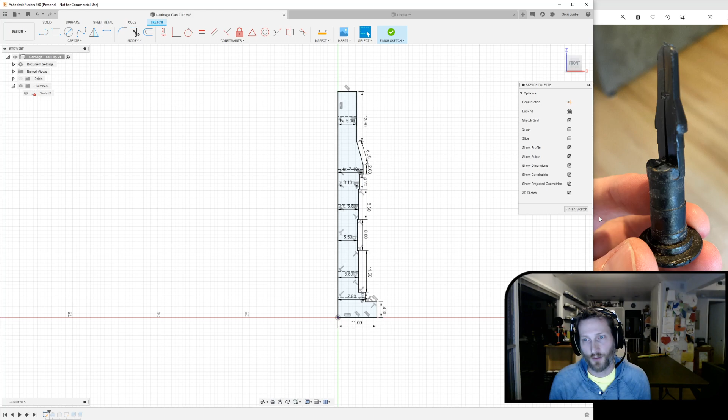So we can see through the history of my actual one. We can jump into the sketch here. You can see all the dimensions that I ended up putting in there. So each of these steps in the stairs that go up and down, I measured what they are, and then also the diameter for each of those. And those are the only dimensions I needed to put in. And then in the very end, I measured from top to bottom.

Now, I didn't put a constraint from the top to the bottom because it surely wouldn't have added up with all of these other ones because of margin of error on all these measurements. But I did sanity check it by testing it end to end, and I was only like a 1/4 millimeter off, and that was certainly close enough. If it was way off, I would need to double check all these measurements. But it was a good way of sanity checking that all of these were correct.

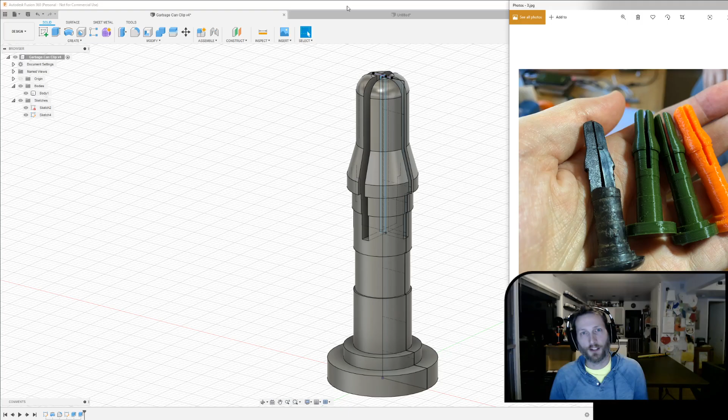So I did the sketch. I rotated it, or whatever. What is it called? It's called revolving. I revolved it around that axis. I filleted the top so you get that nice, easier insertion. And then I created the sketch along these two axes for the two cuts in the top. I don't even know what you would call it. And then I extruded in one direction, and then I extruded from the other cloned one in the other direction. Extruded as a cut operation.

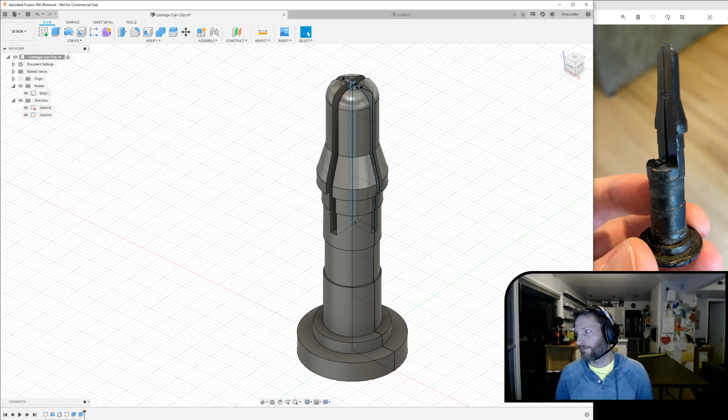And then I just printed it, and it worked. I only had to print 2 of these. The very first time I'd forgotten this little bump here, so the whole thing was too short, and that made this part here that actually holds it in place not line up. So then I did the second one, and it worked. This was printed in PLA just because it's what I already had in, and it's easier to print. And once I was sure the fit was good, I actually stuck it all the way in and just used a hammer to pull it back out.

Then I printed in PETG, which is much stronger and heat resistant, because it's going to be outside and it's going to take a lot of abuse being on that garbage can. And then it worked. So that's how I did this. Again, I'm far from an expert, but hopefully that might help you get some of the basics.

But the main thing that I now think about when I'm trying to make something from scratch is I try to visualize what would I draw and then extrude or revolve and then cut to make it. Because if I can imagine the basic operations before I get started, I'm going to be in a much better workflow to get it done. So I hope that was helpful.